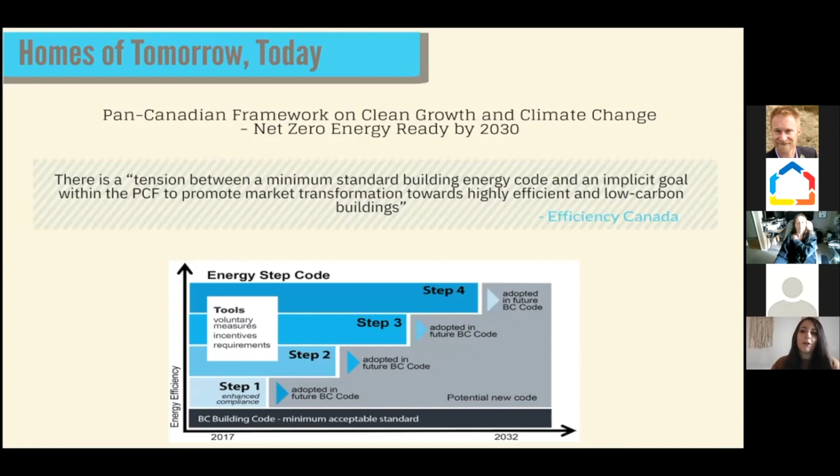Passive House, as you all are well aware, is one of the highest standards for building efficiency. However, my day-to-day work usually involves assisting homeowners and home builders in meeting the basic requirements needed in order to comply with either building codes or energy targets for various programs. A recent report from Efficiency Canada states that there's a tension between minimum standard building code and the implicit goal within the Pan-Canadian framework to promote market transformation towards highly efficient and low carbon buildings. I feel this effect every day for most projects.

BC's STEP code is a good solution to introducing the industry to various strategies in achieving higher levels of efficiency. This will help transition toward higher performance homes for new construction and bridge the gap toward net zero ready within 10 years. Hopefully the application of STEP code will be implemented into future building codes across Canada.

So I've always been passionate about sustainability, self-sufficiency, and holistic practical solutions to environmental problems. When we were looking at alternative home designs as we planned to build our own home, we considered everything from constructing an earthship to gray water recycling. In the end, we decided to construct our home more conventionally while focusing more on the practical application of high efficiency principles in a way that can be replicated easily using locally sourced materials and expertise.

There are different approaches to building very high efficiency, high performance homes. The methods identified in this presentation, such as passive house and net zero energy homes, are not mutually exclusive, but do approach design and implementation differently. The term high performance home will be used to describe either approach interchangeably in order to convey the reduction in energy consumption provided by these methods.

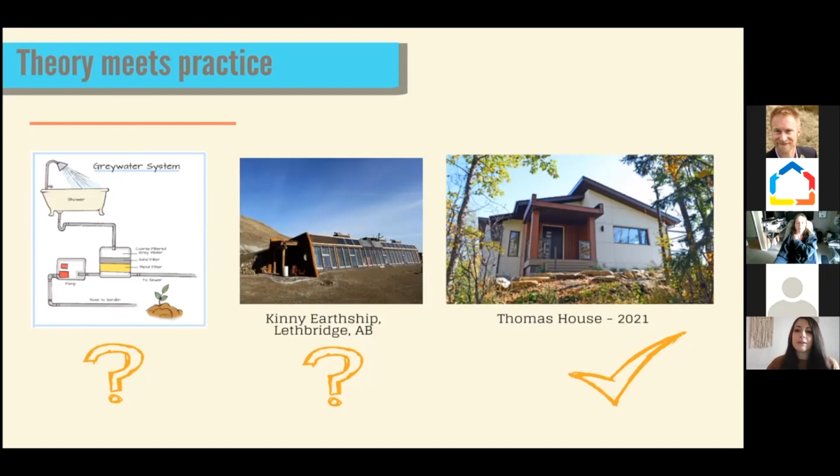Going through the process ourselves in building a high performance home, we can see that building one is indeed feasible both logistically and economically, even for inexperienced home builders such as ourselves to be able to accomplish, but not without lessons learned, as you will see shortly.

So this is our own project. It's called the Thomas House. It was constructed in 2018 and located in central Alberta. It was built using the principles of passive house. It was topped with solar panels generating as much energy as it consumes, sometimes more energy than it consumes, making it central Alberta's first passive solar net zero energy home.

Although it was designed and built using passive house theory, it did not meet some of the stringent PH requirements. It, however, still can be considered a damn near passive house and is a great example of a high performance home. The reduction in energy consumption is achieved through thoughtful design, insulation, high performance windows, increased air tightness, and the elimination of thermal bridges.

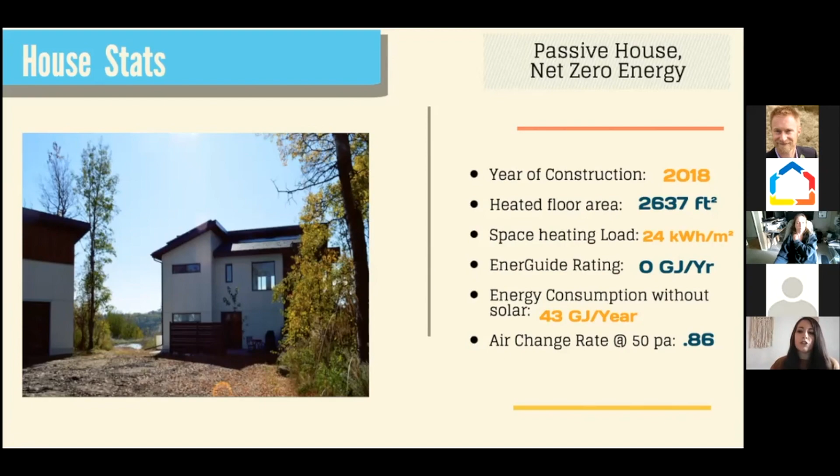The home was built with a double stud wood frame with 1 foot thick walls. The windows and doors are passive house certified, extremely well insulated, and have been designed to let in as much solar light and solar energy as possible on the south side. The building envelope is also breathable. We used a smart air vapor barrier to assist moisture moving through the walls more effectively in order to reduce moisture buildup and prevent mold and long-term structural damage.

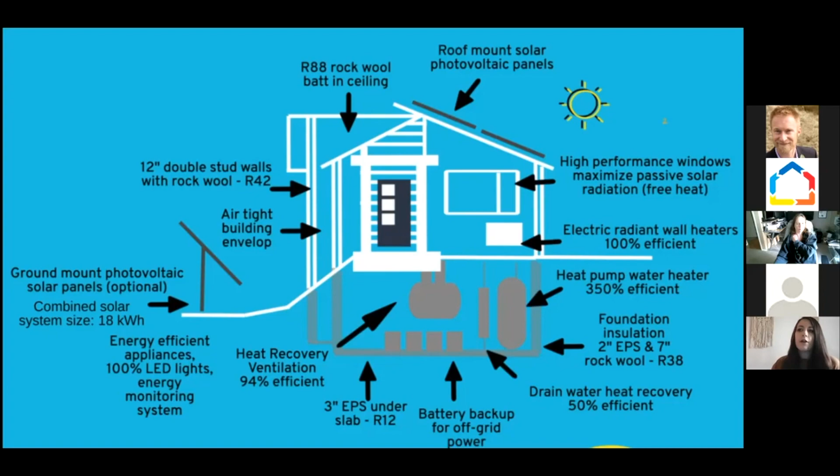We insulated the attic, slab, and walls 2 times what would normally be installed. The house is very airtight and was tested using a blower door system to ensure that all leaks were identified and fixed before we drywalled. We heat it with electric wall heaters and a wood stove when necessary. We installed a high efficiency HRV, heat pump, hot water system, and a drain water heat recovery system.

There are 3 solar systems on the property, 1 on the roof, 1 on the ground, and 1 that powers our water well. The house is served by a hybrid solar system with a backup battery pack in order to protect the home from outages. Some of the additional features of the property related to sustainability include a large garden, xeriscaping, fruit forest, chickens, and rainwater harvesting. Unfortunately, last night we lost 3 chickens due to coyotes.

By conducting site development with conservation in mind, fewer trees were cut and less land was disturbed than a conventional build may have incurred. We use existing ecosystem services located near the site, such as natural runoff pathways, so that we can manage excess water by absorbing it. Site selection was also important in incorporating as much south-facing sunshine as possible for solar PV and passive solar heat gains.

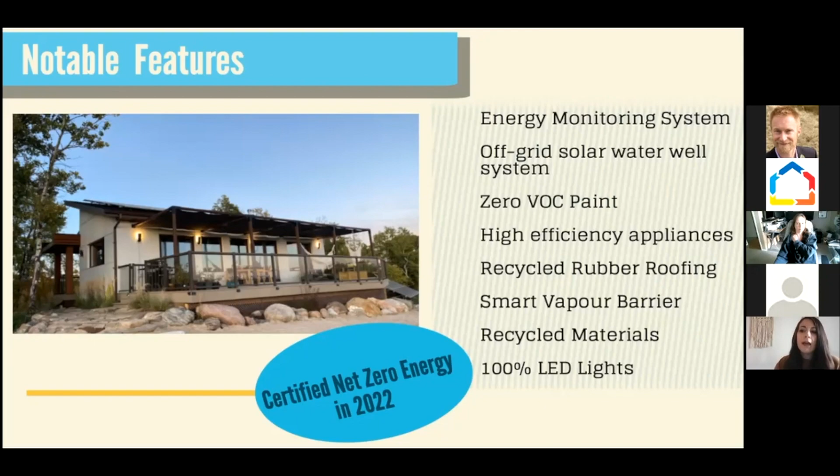We had 3 main objectives when planning our home. The first was energy security and self-sufficiency. The second was cost savings and guaranteed utility prices. We knew that building a very low energy house, while offsetting consumption with on-site renewables, would result in lower greenhouse gas emissions. This tied into our plan to live sustainably, not only in the built environment, but in our day-to-day life.

Lastly, we also wanted to take advantage of the other added benefits of building a high-performance home, which I'll get into later. There were other benefits realized that weren't initially thought of, such as increased health, comfort, durability, and future-proofing, which we now know we're realizing.

To be self-sufficient and energy secure was one of our top priorities. This was important as we wanted to ensure we were less reliant on the electrical system if required. Multiple day power outages have occurred in our area, and severe weather is predicted to increase due to climate change. And in fact, we had a tree come down on our house this summer. No damage, no major damage.

Panels were intact. In order to withstand these effects, having a hybrid solar PV system that was both grid tied and battery-based backup was important to us. Electrical design of the home included allocating certain mechanical, lighting, and plumbing features to either the grid tied or the off-grid systems. If grid electricity were to be inaccessible during low light times, the backup solar system and batteries would engage, and appliances such as heaters, HRV, stove, hot water tank, and select lights would still work.

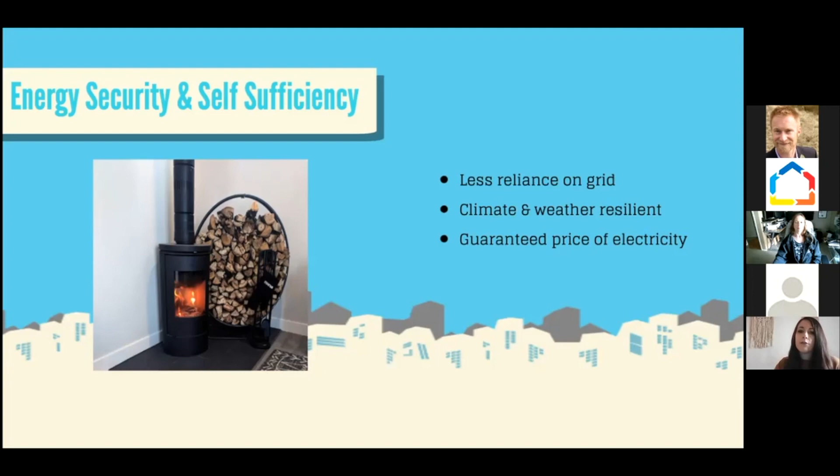Another reason we wanted to design our house was cost savings, both in yearly utility costs, as well as considering the long-term payback period. I'll be honest, I didn't really know how things would end up over time, as it's difficult to estimate true energy consumption and generation of a home due to changing climatic conditions, occupant behavior, utility credit changes, energy cost changes, and other variables. However, after analyzing our costs, credits, upfront premiums associated with building a high-performance house, I know we made the right decision.

There were additional costs of the project compared to a conventional build that were incurred in order to meet the higher performance level. This includes more insulation, higher performance mechanical systems and appliances, additional consulting and testing fees, additional and higher performance materials such as more lumber due to the double stud wall, tapes, adhesives, etc. And lastly, the solar itself, not including the off-grid portion, so the extra panels and the batteries associated to the off-grid system. Costs associated to the batteries and off-grid solar, as well as rural development costs, were not accounted for in my analysis. I also adjusted for economy of scale advantages that a builder would benefit from that we could not because we were homeowner builders.

In the summer, the solar generates way more electricity than we consume, and we receive credits toward our accounts. In the winter, we use more energy than we generate, and those credits go towards energy costs. We utilize a specific solar club pricing through our energy provider, which allows us to switch between generation and consumption months in order to maximize our credits. For example, I think it's the end of October, we switch back to our wintertime price.

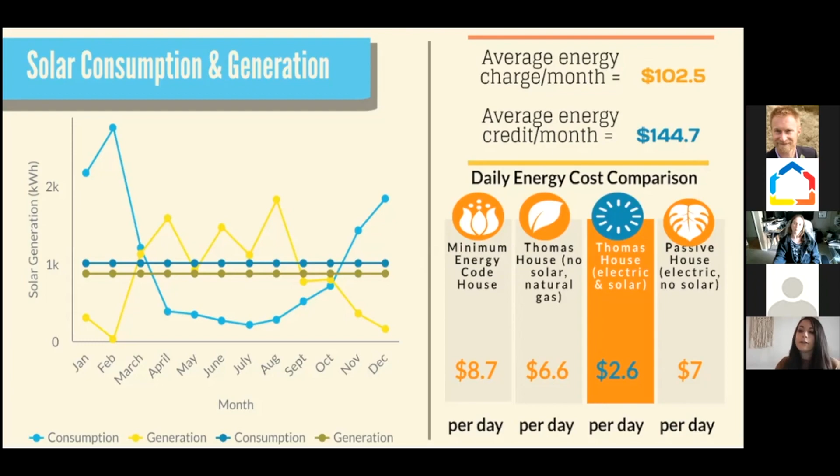Over time, this project will pay for itself in approximately 20 years, based on the 2020 numbers I had mentioned before, compared to the same house but built to a minimum energy code standard. The payback for this project accounted for all fees and energy costs associated to each model's energy sources, as well as the grants received during the construction process for solar energy. There are currently grants for solar on existing homes through the federal Greener Homes program, by the way.

20 years for us is, I think, pretty reasonable. As they like to say, there's no payback period for a granite countertop. Now, this is also a snapshot in time as energy prices increase, if solar credits increase, hopefully, and potentially if the energy system transforms to encourage behavior changes to reduce consumption, the payback period may become even shorter. Since this analysis was conducted, the credit price for solar has since increased by 4.5 cents per kilowatt hour, which will reduce our payback.

So I guess while she's reconnecting, she does look like she's meeting the PHI low energy building certification, which is what most people are starting to find in our cold climate is the most cost effective anyways, which is actually less than the 30 kilowatt hours per meter squared, and she was down at 24. So she's right in there on all the performance metrics. Hopefully she comes back in a few minutes.

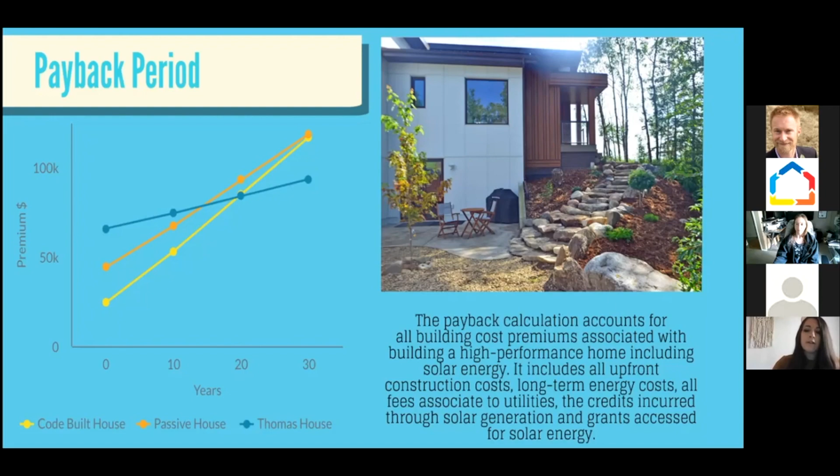Since this analysis was conducted, the credit price for solar has increased 4.5 cents per kilowatt hour, which reduces our payback period even further. I want to also mention that there will be another way to fund the additional costs associated with improving the efficiency of homes in the near future.

Eventually, municipalities around Alberta will also be participating in the Clean Energy Improvement Program that Edmonton is currently piloting, and other municipalities like Rocky Mountain House are rolling out. This program will basically allow homeowners to improve the performance of their home or add solar energy through a competitive financing option that is paid back with the regular property taxes. The investment is then tied to the house rather than the homeowner.

Another goal for this project was sustainability, of course. We wanted to reduce our environmental footprint as much as possible. By producing more than we consume for energy on certain years, this also reduces our greenhouse gas emissions. This house is estimated to produce 16 tons of CO2 annually without solar. However, since it produces as much or more energy than it consumes, the home will mitigate these greenhouse gases and only produce an estimated 0.2 tons per year.

The solar energy installed will save the equivalent of 3.5 passenger cars taken off the road for 1 year, or under 18,000 pounds of coal burned. If this house were to be built to minimum code standard, it would generate about 35 tons of greenhouse gas emissions per year, equaling about 7.5 passenger cars, or 37,000 pounds of coal burned. Over the course of 40 years, we'll take about 300 cars off the road.

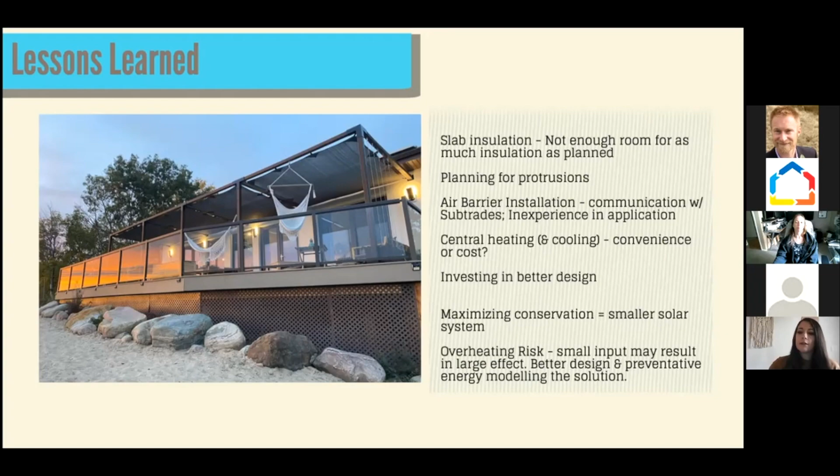A challenge with high performance homes is the risk of overheating due to the fact that they require very little energy input in order to raise internal temperatures significantly. This can become uncomfortable, which we did see in the first year as the home did get excessively hot, mostly in the afternoon in the summers when the sun was on the south and west side.

Passive ventilation techniques were applied as much as possible, including opening windows for cross breezes, opening a downstairs window and an upstairs window, which creates natural ventilation due to pressure differences. That's called stack effect. Utilizing the cool night air in Alberta is also an excellent form of free cooling. However, further analysis could have been conducted in order to get a better idea of cooling needs, which I know now and we conduct on current projects.

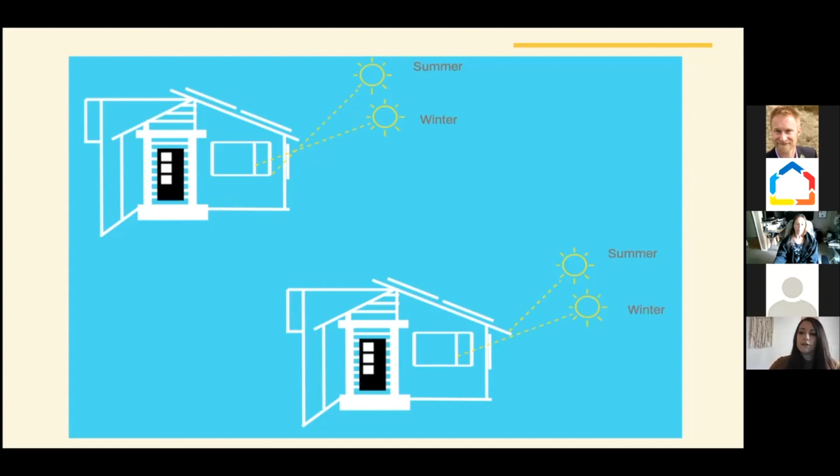We decided to install removable sunshades on the south side deck, as you saw in some of the previous images, which provide shaded area on the patio in the summer, while ensuring that the precious wintertime sun is still accessed by the south glazing. This simple, low-tech and low-cost solution provided the answer to this problem, but it could have definitely been planned for initially.

So as you can see in the energy consumption results of the Thomas house, this is comparative: if this house was meeting Passive House standard as well as the Canadian Home Builders' Association's net zero program requirements, and if this house was built to minimum code standard. To compare with the above program energy standards, the Thomas house performs 71% better than new homes constructed today, less than the 75% improvement for Passive House.

It does perform much better than the minimum net zero standard with a 48% savings in annual space heating loads, which is a 15% improvement over the program requirements. And the building envelope alone has an 80% improvement over a code-constructed house. We anticipate this project to be certified through CHBA next year as net zero. Its EnerGuide rating is 0, which means that it consumes 0 gigajoules of energy over the course of the year because of the production of the solar system.

Lastly, the total energy consumption was compared to as if this house was meeting minimum energy code requirements. Without the added solar energy, it would still be a low energy, high performance home at 43 gigajoules per year. The conventional home would consume about 119 gigajoules per year for heat and power.

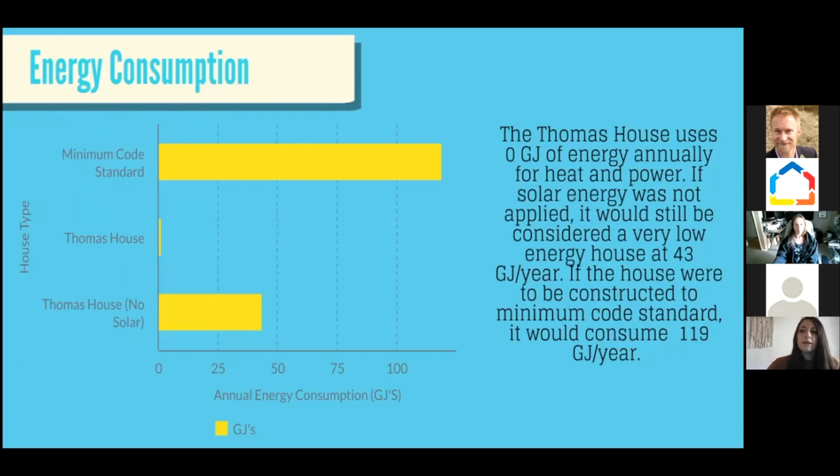And this project was our personal attempt to do better in this world. It opened up the opportunity for us to work with the community in better understanding home energy and renewables, as well as helping our own clients in meeting their own energy goals.